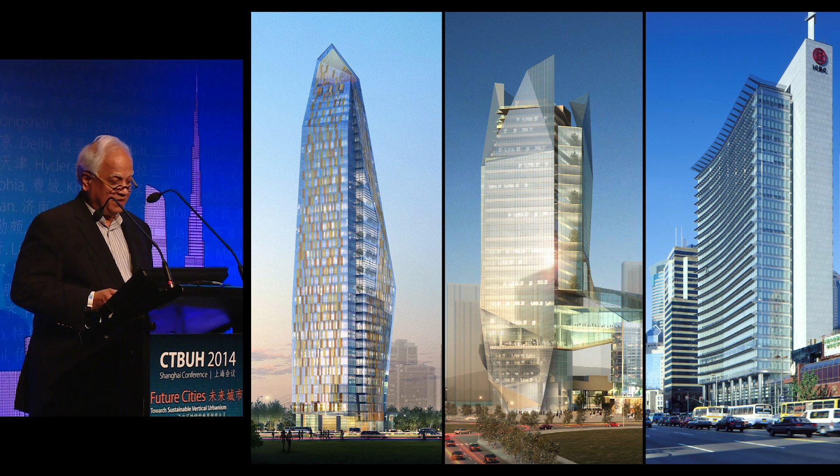Some of these buildings are under construction. The one on the left-hand side is in Istanbul. The one in the middle I'm designing right now near Shanghai, not too far from here. To many people's surprise, the building on the right is the building we did almost 15 years ago in Shanghai. It's a headquarters building for ICBC, but you can't find the building anymore because all the surrounding area is so much taller and so much denser that it is quite interesting.

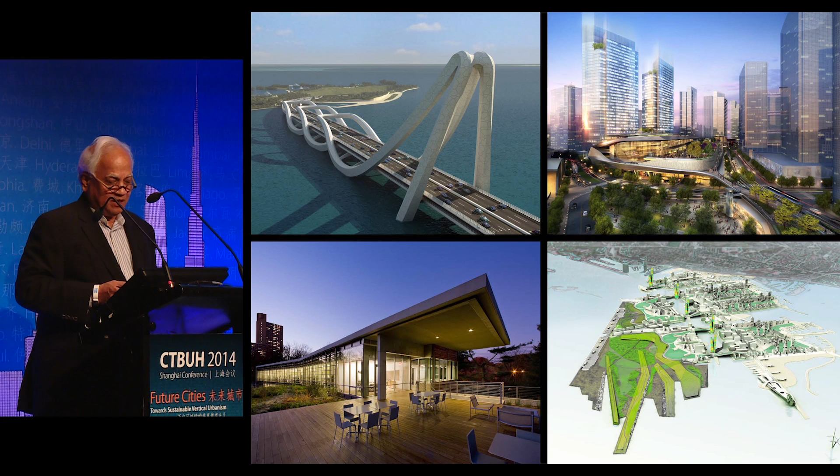With that as a background of the firm, and talking a little further in terms of our practice, I'm one of those few architects who also design bridges, and we do enormous scale master planning work as well.

Some fundamental facts: for the last 2 days you've been hearing a lot about density, vertical growth, and creating human scale throughout all these projects. We have 29% land and 70% water on this Mother Earth. Our Earth's population is about 7.2 billion and is growing at a rate of 74 million per year, which is quite a number.

Currently about 5 out of 10 people live in cities or urban environments. By 2030, it's expected that 6 out of 10 would live in urban environments, and by 2050, about 7 out of 10. In China, they have intensified this urbanization program to a much higher level, which is quite remarkable.

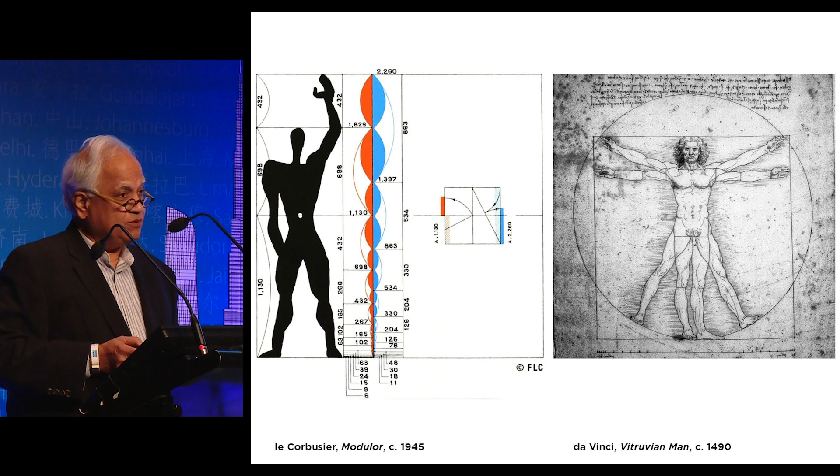To mention human scale, we as architects, engineers, and designers have been grappling with this issue as we build, in terms of what is right for us and what makes sense. The image of Leonardo da Vinci is very famous, from 1490 - he grappled with these issues. Corbusier created this notion of the Modulor man in 1945. So we have been trying to deal with this issue, and it is a subjective issue. That's why I called this whole topic social sustainability.

I can vouch for that because I was doing a project in Manhattan on Wall Street, and I had a project office there. It used to make me so uncomfortable in Wall Street because the sunlight doesn't penetrate many of the streets in that area.

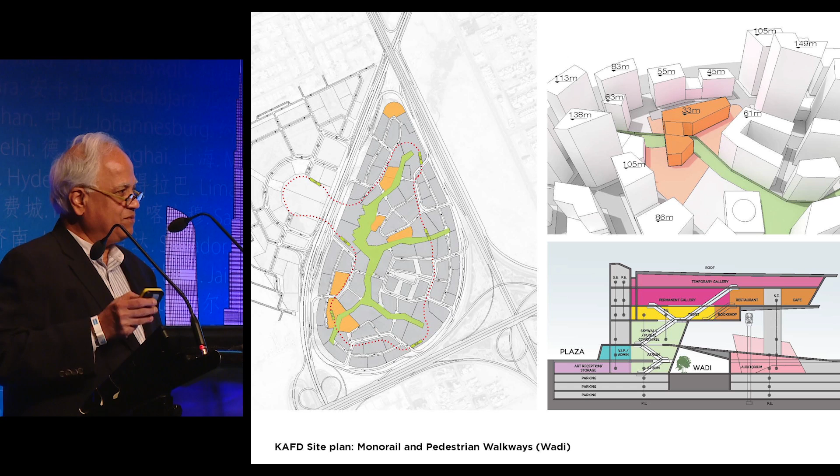Density that I thought, when I started to work on the project, would not work. I thought it would be a disaster. It was so dense. But in that bright, sunny environment in Saudi Arabia, where temperatures go to 120 degrees during the summer, it works, and it works brilliantly. I'm the first one to tell you that when I'm there, that little bit of shade does make you comfortable, even for a few seconds, because the temperature variation may be just a few degrees, but it's enough to give you that comfort. And so they created that. They created artificial topography, they created density.

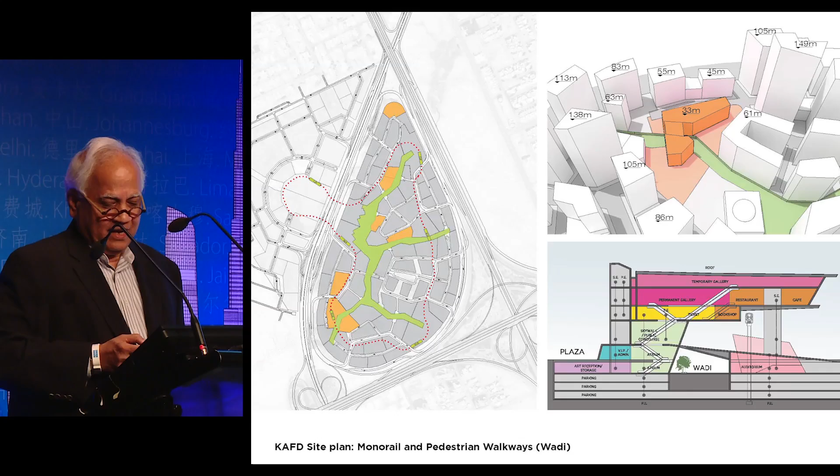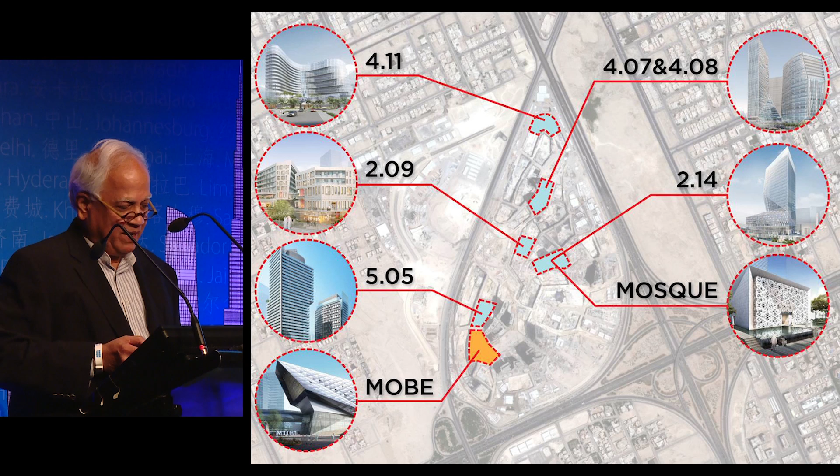And the first thing is a mixed-use building. The entire project is mixed use, so you can work, you can live, you can raise your families, you can raise your children, you can go to school, you can do everything within this small community of 5 million square meters, which is not a small thing.

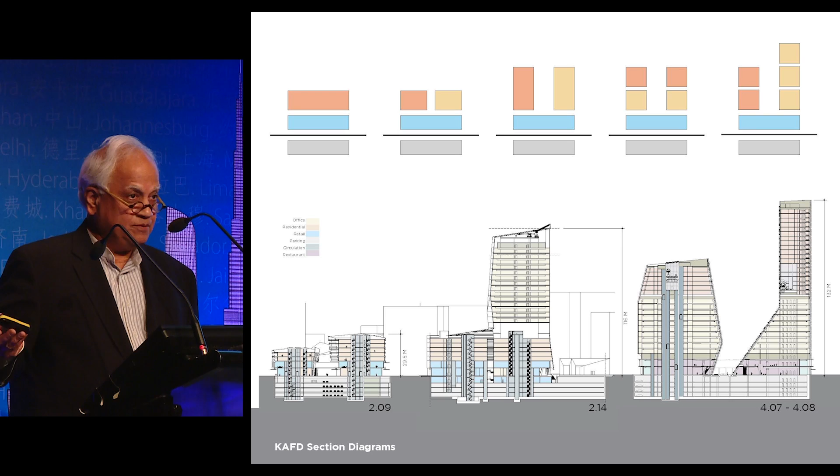Parking is mostly below grade—not mostly, it's all below grade. The artificial topography created by the Wadi, which is 6 to 7 meters deep, is strictly for pedestrian use. Although temperatures in Riyadh do go high, in the evening hours they drop dramatically. And to my surprise, during the winter time you really need a coat or jacket in Riyadh, which is hard to believe, but it is so. It gets a bit cold as well. So the point to make is simply that...

The parking is below grade, mixed use. We did residential as well as office as well as institutional buildings in different mixes—4 or 5 mixes we tried in different buildings. One case is just residential. In one case, residential and office side by side, small scale, low scale, residential on top, residential on the side. We tried everything, and we have designed all of that and built.

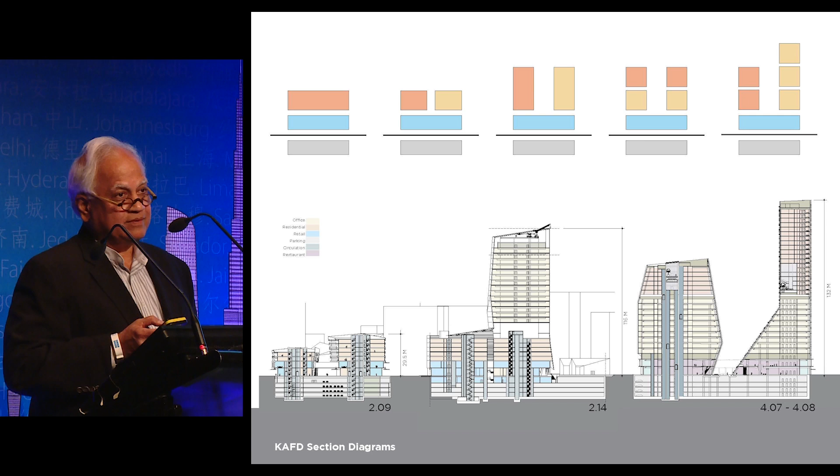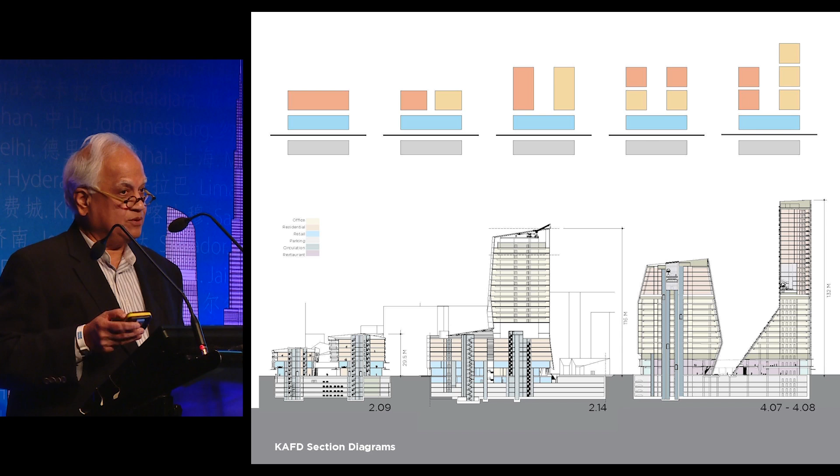All of these buildings are almost built, by the way. And the reason for these mixes of various kinds was so that we can support the economic groups in various categories. So younger families, or younger unmarried or married young couples, could live on top of the buildings with smaller apartments, while apartments closer to the ground, bigger scale, could be used by families with kids. And then there are, of course, some middle size for more affluent and more settled families. So we tried to mix all of these various residential typologies.

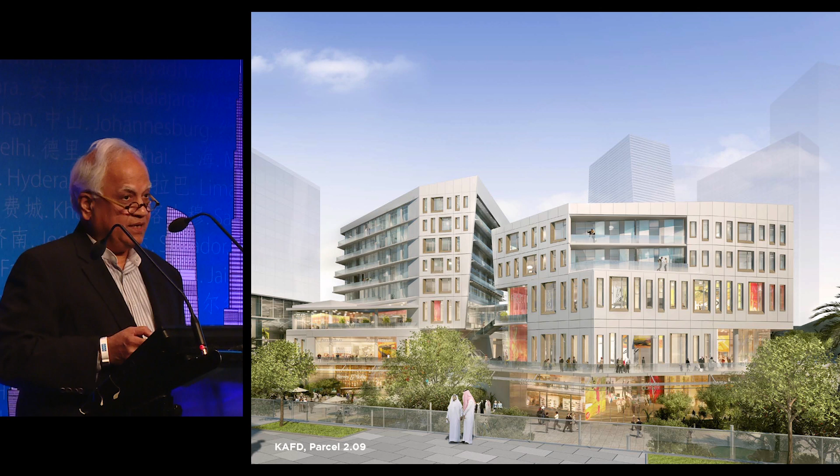Smallest buildings were these 2 residential buildings, 5 stories, retail below, parking below, using sandstone, limestone, which is very common to Riyadh, and then creating facades which broke down the scales. But they are not decorative surfaces, by the way. They are strictly functional in all its aspects.

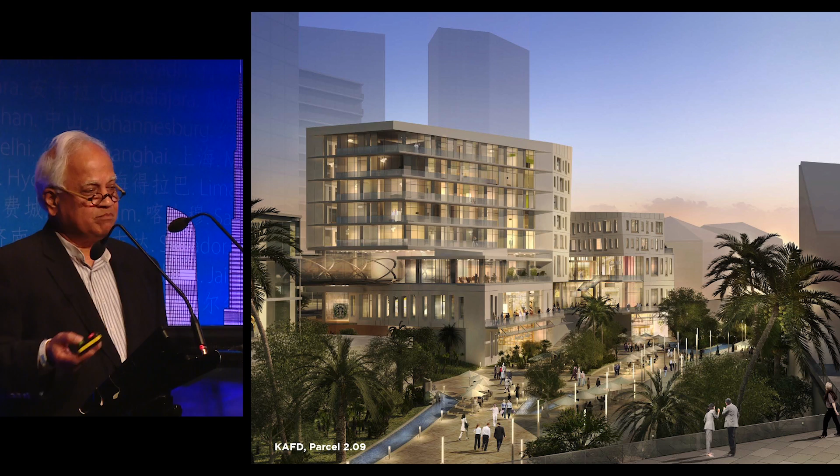The landscape element, which is the wadi, is strictly for pedestrians, no cars. Cars are only on the roads, which created this sort of private as well as public environment within the community. In another parcel, we designed residential along that pedestrian walkway with a tower pushed back.

I shouldn't even call this a tower, it's a 30-story building, which is relative to Shanghai is a tiny little building, but nevertheless it allowed us to relate the human scale to the buildings. Again, the wadi.

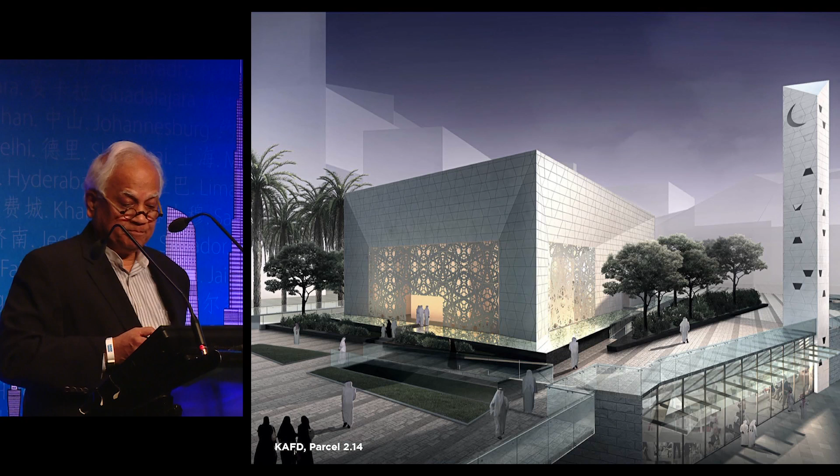Along this same parcel we had an opportunity to design a mosque. Talk about a mosque, I had no idea about the religion of Islam. I had to learn very quickly, but we did it.

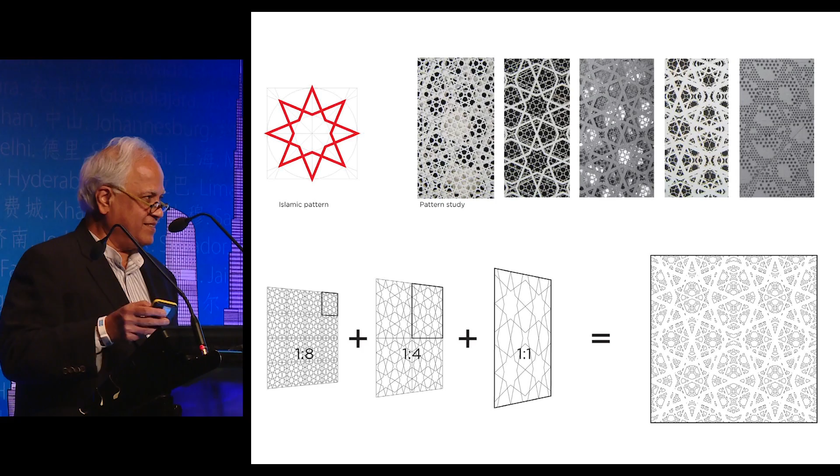In this particular case, the point to make is simply looking at various components gave us a perfect opportunity to use decorative surfaces for filtered daylight. We studied this to death, in terms of how do we do it, what's the significance, what's the symbolism, and so on.

We created this building with decorative surfaces which filter the daylight. It's not in stone, by the way. The building is in marble, but the grill itself is a double grill made with metal. We intentionally did the opposite. The building itself is white marble from, I believe, Macedonia, which is interesting.

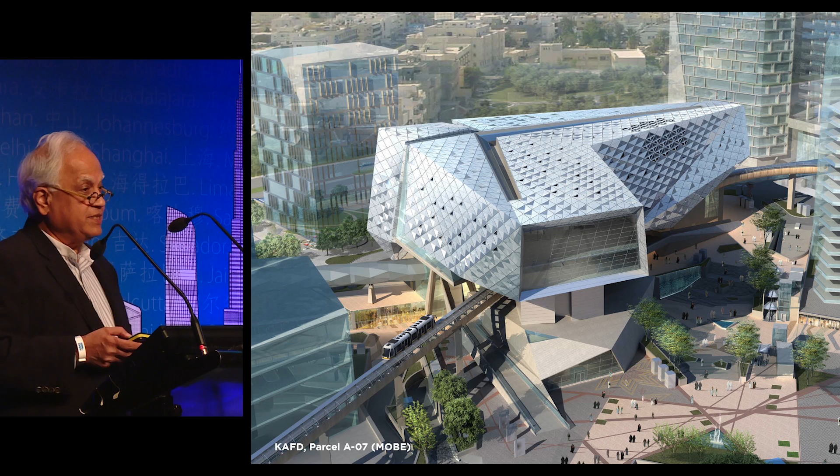We were also asked to design a museum, not a small museum - the total area is bigger than the Metropolitan Museum in New York. We created this building with textures of surfaces. It's a double wall, and the intention was to constantly relate to the human scale, admit daylight in an appropriate manner, and yet control it in this harsh environment.

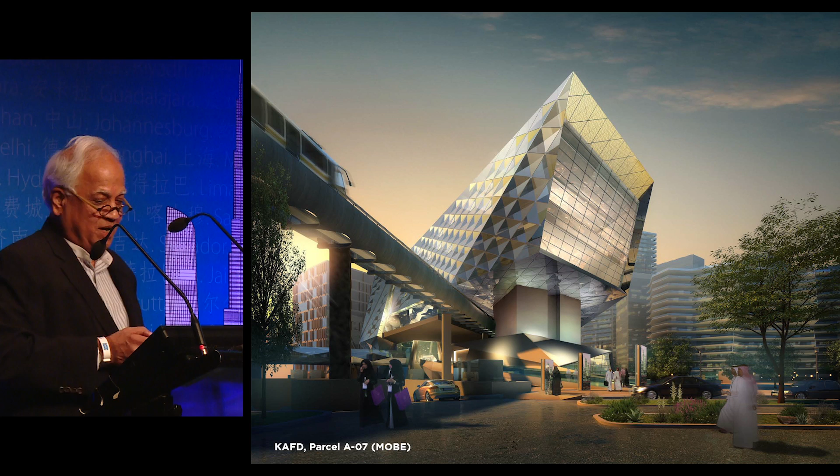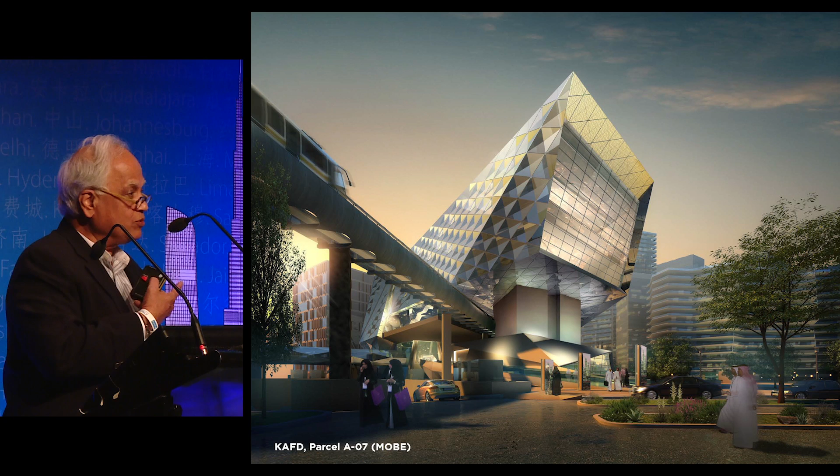This entire neighborhood has a monorail going through, connecting all these buildings. In this museum, the monorail literally goes through the building, so we had to incorporate the station within the museum. You can imagine the complexity of circulation between private and public, but nevertheless we resolved it.

It's going to go into construction pretty soon, by the way - the bids are in. Two buildings that we designed, already built, have a big retail base at the bottom.

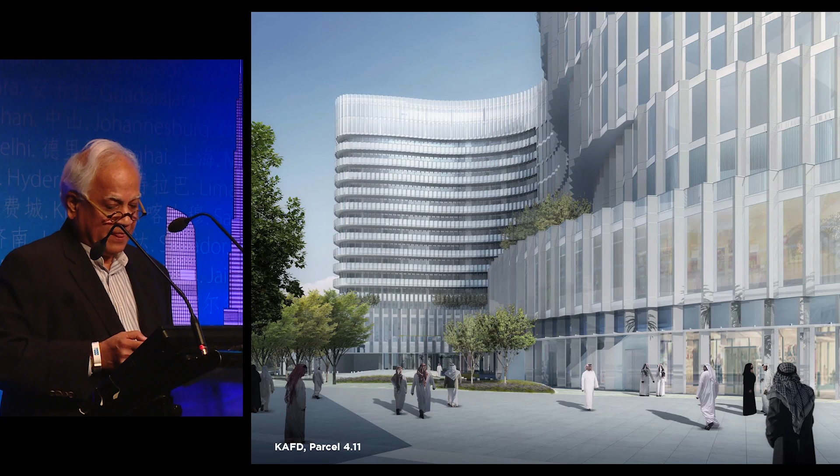Similarly, some of the other buildings have connections to the adjoining building. Because of the temperature variations, we created these pedestrian bridges based on the master plan that was created, so one would pass through this building during the afternoon harsh climatic weather, and that was great.

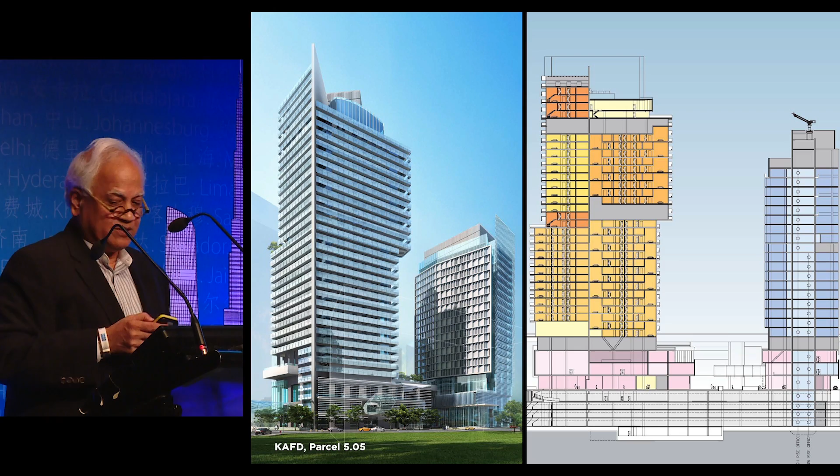Another project we did there was residential and office buildings side by side. The section I'm showing intentionally shows the mix of residential, how they got stacked on top of one another, how we created two different spaces of different kinds, creating landscape components, and showing one specific component of the building as to how the sun shading devices as well as privacy screens were used in a decorative manner, but yet totally functional.

I'm very proud of this particular facade. This will surprise you - it's actually marble laminated on glass, so it's an IGU unit. Cricursa out of Spain is fabricating this. As a result, during the daytime the building would glow internally without really doing a light.

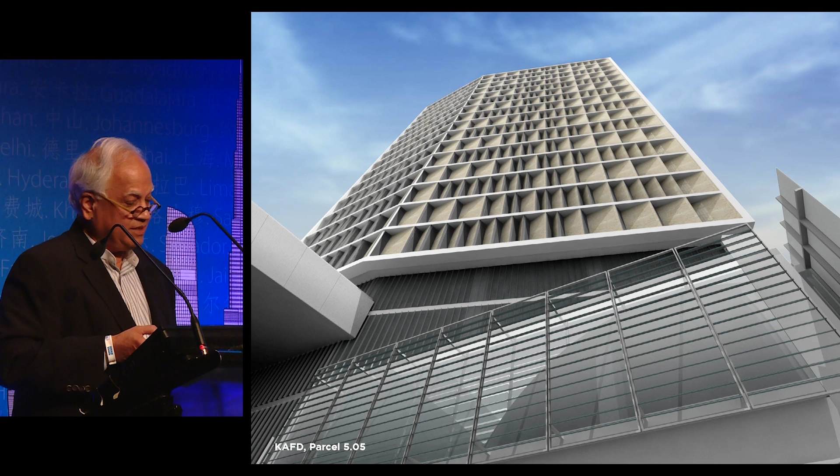And at nighttime it would reverse itself and glow with an internal light outside, so no artificial lighting or decorating the buildings in any manner. It's very, very cleverly done. It's under construction - I've seen the mock-ups in Germany and it looks wonderful. These are some of the details of that facade.

And finally, the conclusion is essentially that I think density is critical, but bringing the human scale and components which will make us comfortable is as critical to think about. These are subjective issues, not issues that you can measure. It requires probably a lot more research, but nevertheless these are very critical issues: aesthetics, creating spaces, details, materiality, dealing with climate, culture, and on and on.